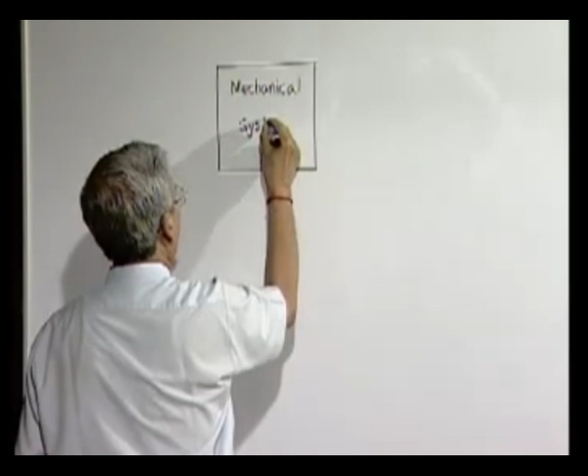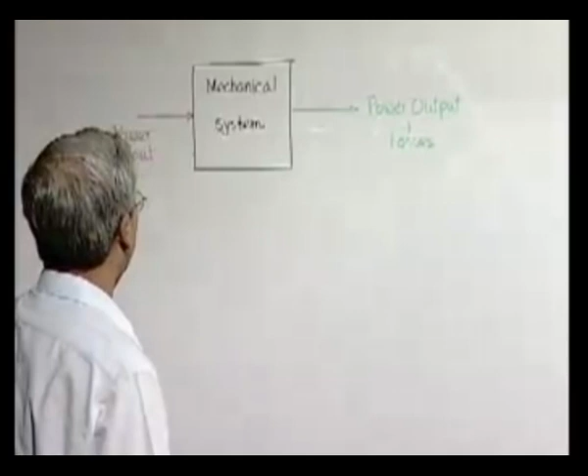If we take a mechanical system, its condition can generally be specified by two things: how much power input is there, and how much power output plus losses. So what is happening in a mechanical system, irrespective of its nature, is that there is power input from one side putting energy into the system, and the mechanical system is doing some work and spending energy, with some losses in between because of friction etc. within the system.

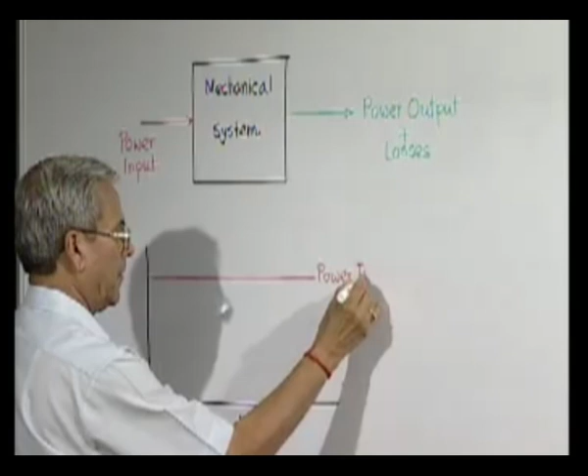Now, what are the different situations possible? If we consider that with time the power input is something like this, and the requirement of energy for doing the task plus the losses are something like this.

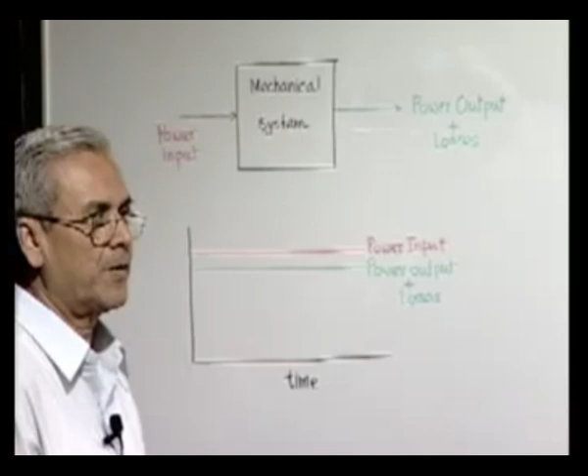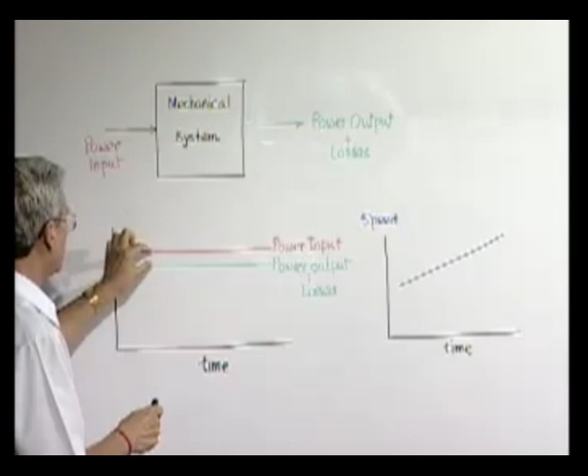Now we know that if we are putting energy at a higher rate than the rate at which energy is being consumed, what is going to happen? Energy can never be destroyed, so it remains in the system. It gets accumulated, and a mechanical system accumulates energy in the form of kinetic energy. So the speed at which this mechanical system is operating will gradually change, and we will find that with time the speed of the machine will gradually increase, because more and more energy remains in the system, resulting in a gradual increase in kinetic energy, that is the speed of the system.

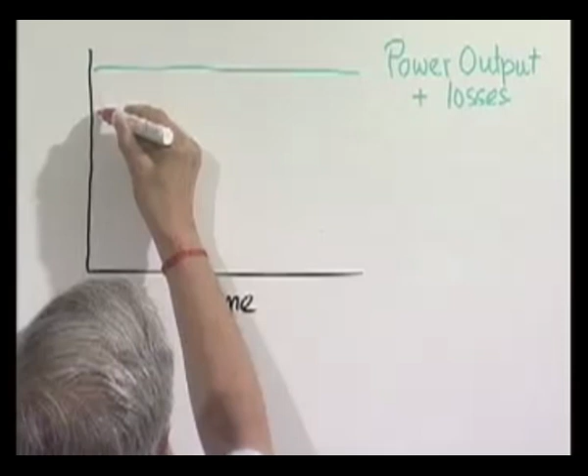The reverse situation is there where it can be less. Repeating the same diagram, only in this case now your power input is less and the power requirement or expenditure of energy is at a higher rate. So the reverse thing will happen here. Whatever energy, or the rate at which we are putting energy into the system, we are consuming energy at a higher rate, and where from that extra energy is going to come?

Obviously, whatever kinetic energy is there in the mechanical system, part of that will supply the deficiency. As a result, we can easily understand that in this case, with time, the speed of operation of the machine will slowly decrease.

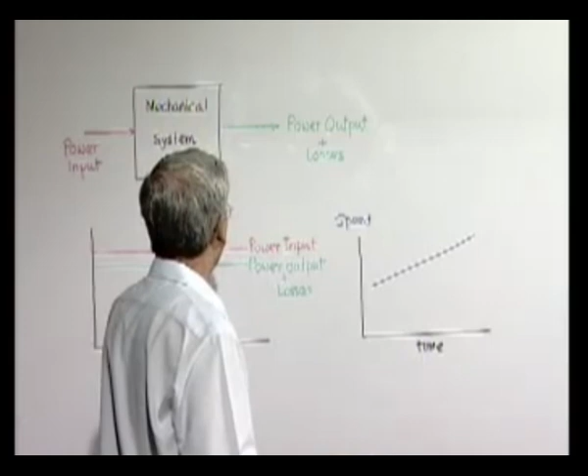Both these types of operations are called unsteady operations. You can see that when we are starting an engine, initially the speed of the engine was say zero, then gradually it increases. During that period we have to put more energy into the system to bring the operating speed to the final steady level. Similarly, when we stop some mechanical system, the power output will still be there because work is still being done, but power input has been switched off, so the speed will slowly come down. These are the transient periods at the beginning and end of operation.

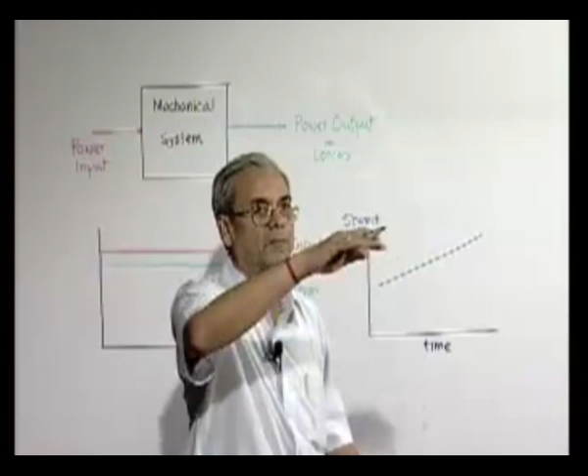But during the actual operation of a machine, what happens? We expect the operating speed of the machine to overall remain the same. So in a real situation, though we have shown diagrams like this, the speed is never that steady. There is a rising curve and a falling curve, something like this. But what we are concerned with primarily is when the speed of operation of the machine remains constant, that is, steady operation.

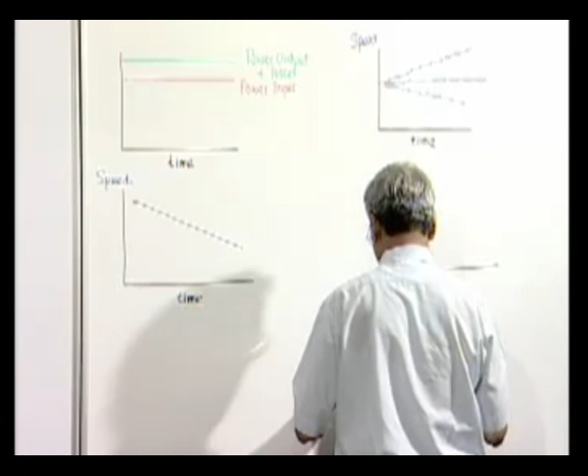The ideal steady operation will be like this: with time, the energy input is like this, and the energy output and losses are also equal. So this is the idealized situation for steady operation.

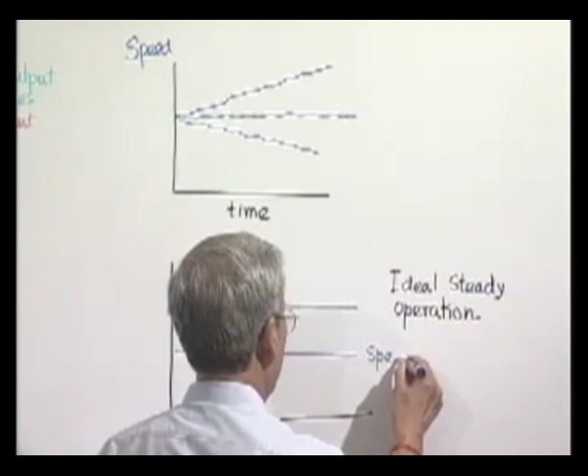And the speed in this case will be just constant again. But we all can understand that in reality such a perfect situation is never realized. What happens is the average of the power input and average of the power output plus losses will be the same, and the speed will also remain the same on average, though there will be fluctuations.

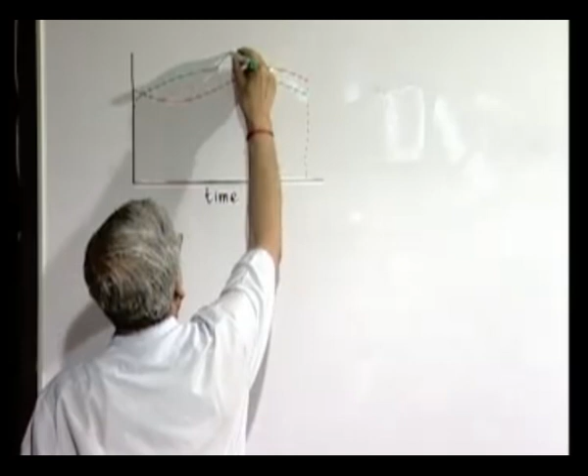What is that situation? Let us examine it in more detail. Let us take up a case where the situation is like this, with time the input and output power variations are something like this. This is one complete cycle, so this is the output power, and this is the input power.

What we can realize is that the average will be the same for both the input and output. So this is both the average of input and output power.

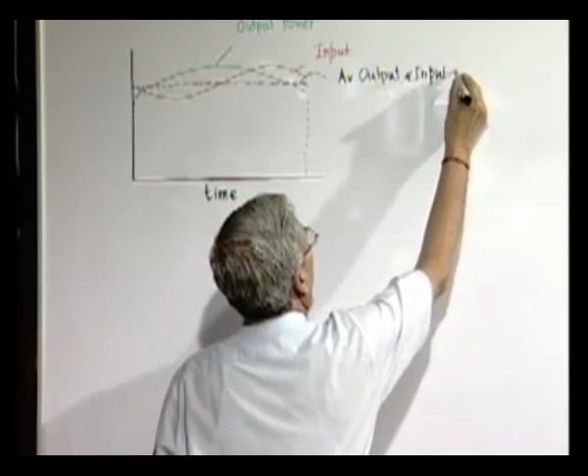Now what is going to happen to the operation of the system? That means the speed of operation. We see that though the average for both the input and output powers are the same, there are locations where, at every instant except for this instant and this instant, everywhere else the instantaneous input power and instantaneous value of the output power are different.

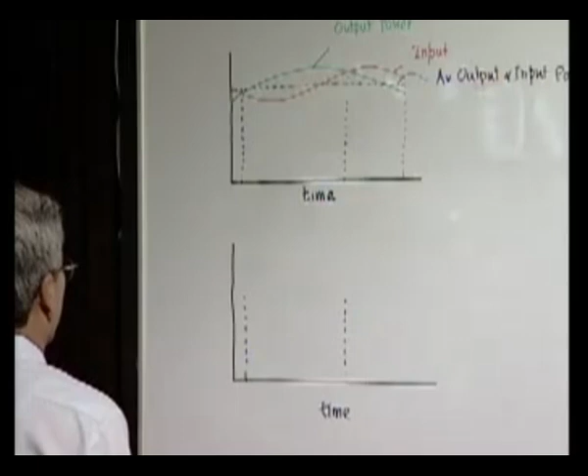So what will happen is that depending on the situation, the system will either accelerate or decelerate, except at two instants where the input and output powers are exactly the same. So what is going to happen during this period where output power is more than the input power is obvious, the engine speed will come down or slow down. Similarly, in this period, from here to here, this is one cycle.

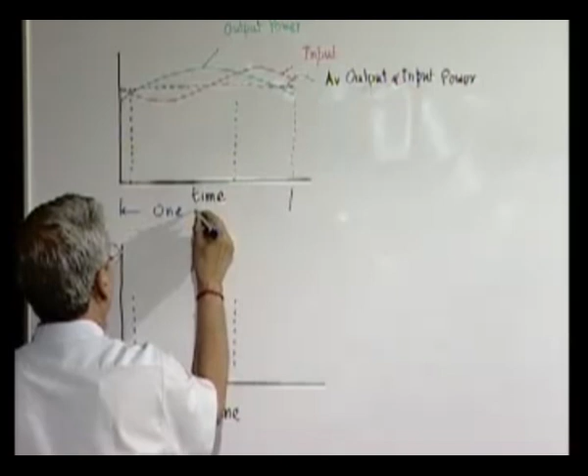Because in steady state everything will be in a cyclic pattern, this is one cycle, after which the pattern repeats. So here what will happen, input power is more, so obviously the speed will increase or the system will accelerate. So therefore, the situation will happen like this.

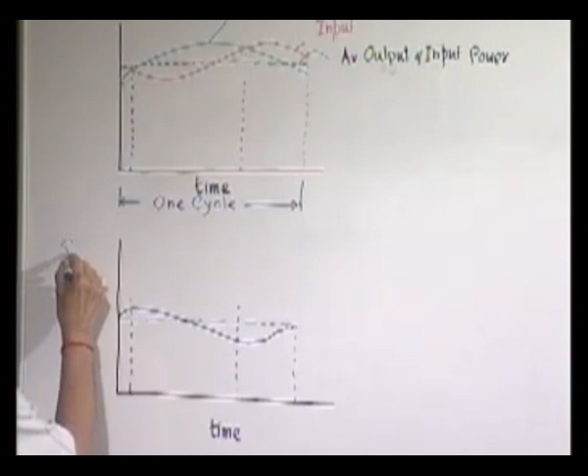So speed is constantly decreasing from here to here because output is more, and speed is increasing here because input is more. Therefore, you can see that in general, where the output power and input power instantaneous values do not match at every instant, but the averages are the same, though the average speed will remain constant, the instantaneous value of the running speed of the system will change or fluctuate, and there is a cycle after which the whole thing will repeat.

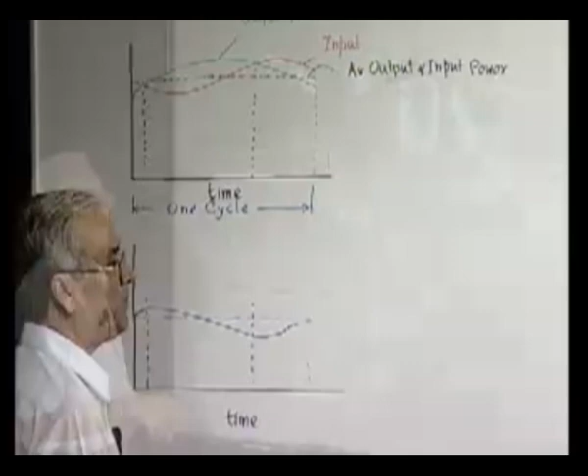This is in general the situation with all cases. So therefore, we find that we now have a non-steady or rather non-smooth operation. The operating speed of the system is fluctuating. In the previous case where we discussed the balancing of unbalanced masses, the nature of non-smoothness was due to the shaking forces produced by the unbalance. But here the non-smoothness of the operation is because the operational speed is fluctuating, and this is the reason for that. So now let us consider the cases which we will generally encounter.

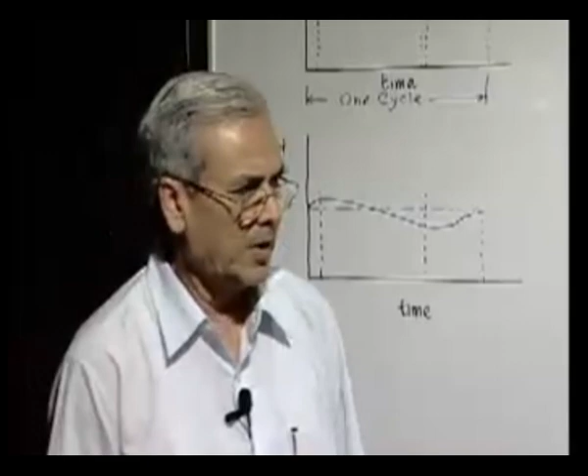In general, we will find two types of cases. Of course, this is the most general situation where both the output power and input power are both varying like this. But in general, we will take up the cases often encountered. There are two situations.

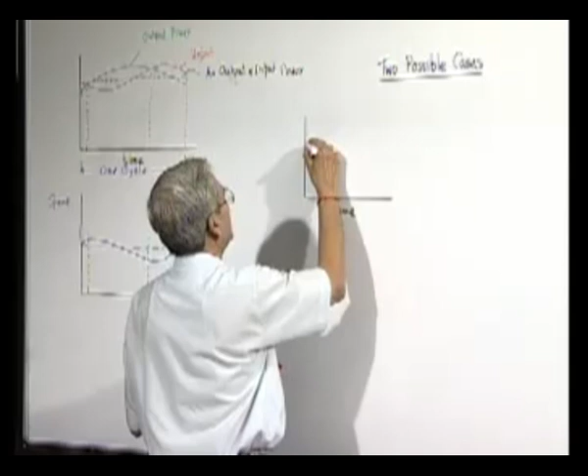One in which the input is fluctuating and output power is uniform, over one cycle. And the other situation, idealistic situation of general nature, is where the input is constant and output is fluctuating.

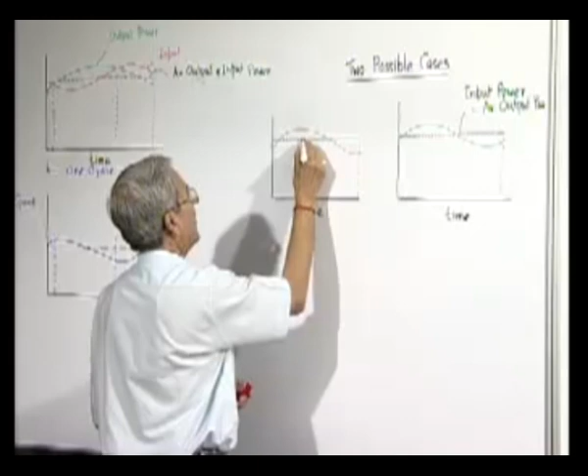In both cases, we have to keep in mind, because it is a steady operation, this is not only the input power, but it is also equal to the average output. Similarly here, this is not only the output power, but it is also equal to the average of input power.

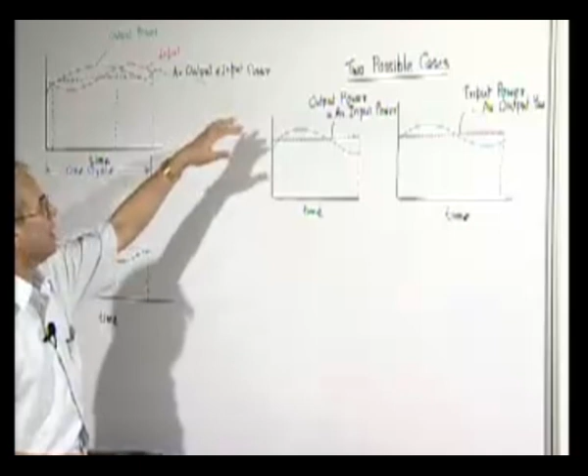So these are the two generally encountered situations in mechanical dynamics or machine dynamics, where in one case the input power is fluctuating, output power or the load is constant, whose average value happens to be equal to the average of the input power, because otherwise the situation will not be steady. The speed will slowly change, not just fluctuate. And the other possibility is that where the input power is more or less constant, but the output power or the requirement, the load, is fluctuating, and again the same condition for steady operation applies, that the averages of both are the same. Now for these two possible cases we can think of examples.

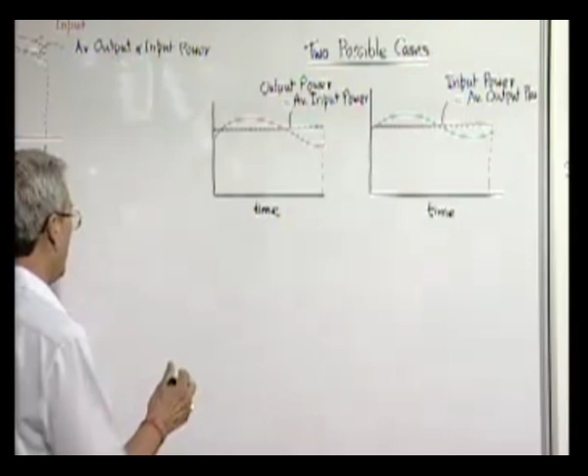Now we can get very common examples in this case, say where the input power is fluctuating, the output power is uniform or steady. A very common example of that will be an engine, an IC engine driving a generator set.

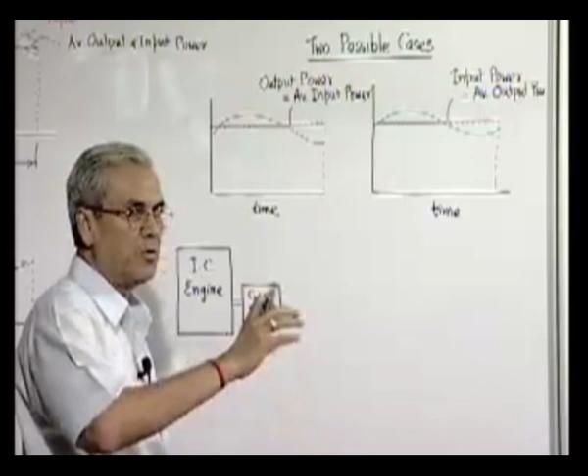Producing electric current, and the load is constant, this is the IC engine, say diesel engine. Here you will find the mechanical torque produced on the crankshaft is fluctuating, that is input power is fluctuating, but the load or the resisting load produced by the generator is constant, as our electric load is constant. So this will represent a situation like this.

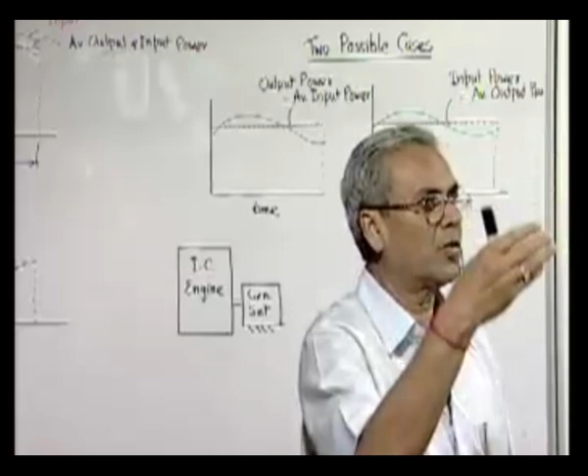On the other hand, if you take up a case where a motor is driving a punching machine, for example, a die punch machine. So here what happens, motor is producing a constant voltage and constant torque, so input is constant, but the load requirement is fluctuating. Most of the time there is no load except friction, then once the punch comes in contact with the plate or the sheet metal, immediately the load starts increasing.

So here you will find that the situation is something like this. In both the situations the speed will fluctuate. Our objective of this discussion is to find out the ways and means to estimate the speed fluctuation and how we can keep it within tolerable limit.

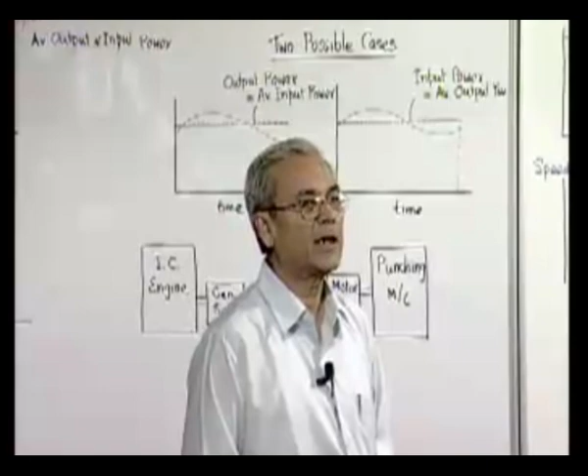The point we have to keep in mind is this, that though the average speed remains constant, the instantaneous speed varies and it fluctuates. Now, depending on the operation, there are permissible limits to which we can allow this operating speed to fluctuate. If the operating speed fluctuates too much, then the functioning or the performance may not be acceptable. And therefore, we will see what can be done to keep that fluctuation of speed within the permissible limit.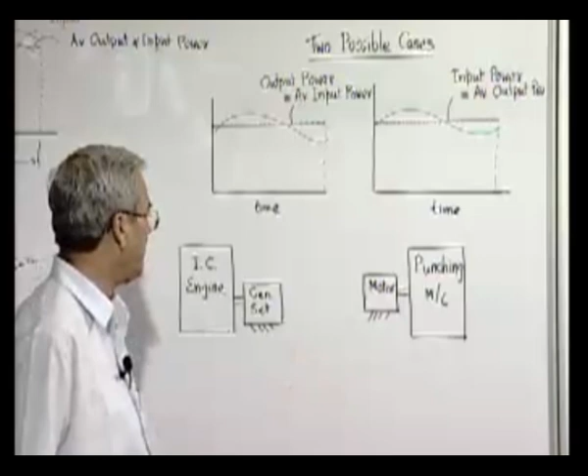So, we will first take up the most commonly encountered situation, that is an engine driving a mechanical system, either a pump or a generator set or a machine or something.

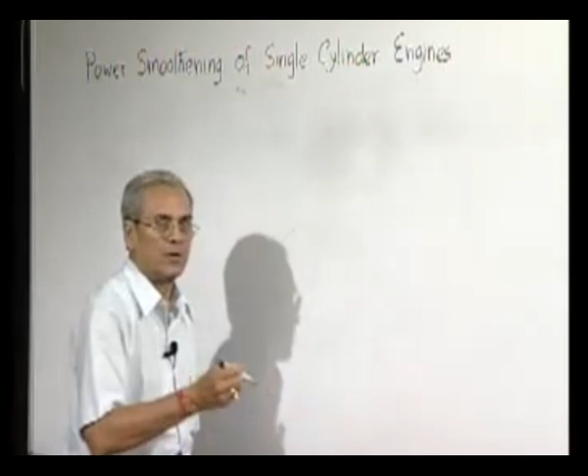So, we will take up the very commonly encountered problem of the nature we are discussing, is the power smoothening of single cylinder engines. So, what we will do first is to find out the fluctuation of input power in case of such a situation. So, we will again come back to our model of...

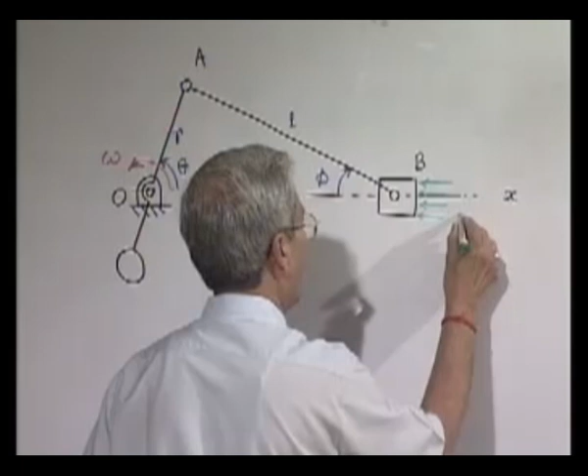So, this represents a single cylinder engine. Now, what we have done, if you remember our previous lecture while discussing the unbalance of a single cylinder mechanical slider crank mechanism, we saw that it is possible to replace the mass of the connecting rod AB into two parts, one at the crank pin here, other at the reciprocating mass here.

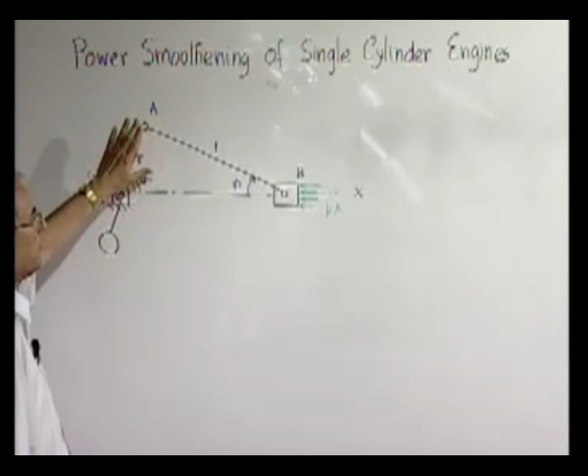And we have seen that this mass, the crank's original mass, all these are actually purely rotating objects, and therefore, to balance that we always generally put a balancing mass, but really it does not play any role in this analysis which we will be doing. On the other hand, the other apportioned mass which goes here, that along with the mass of the piston etc., in total becomes reciprocating mass, that we have seen.

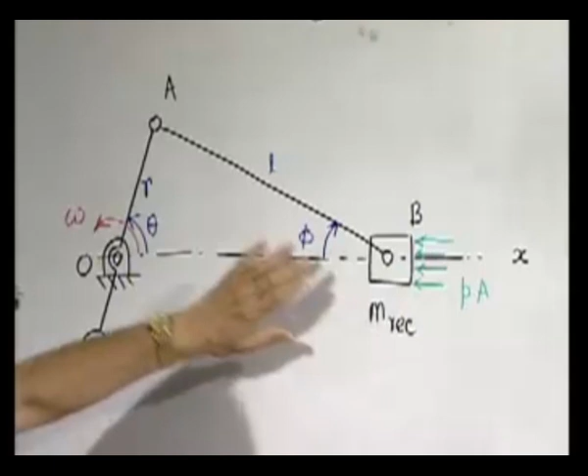Now, what we will do here is to find out that if a gas force, which is the pressure at the instant of the gas within the cylinder, multiplied by the piston area A, this total gas force produces how much turning moment on this. The reason is this, that turning moment M, that multiplied by the speed gives the power input.

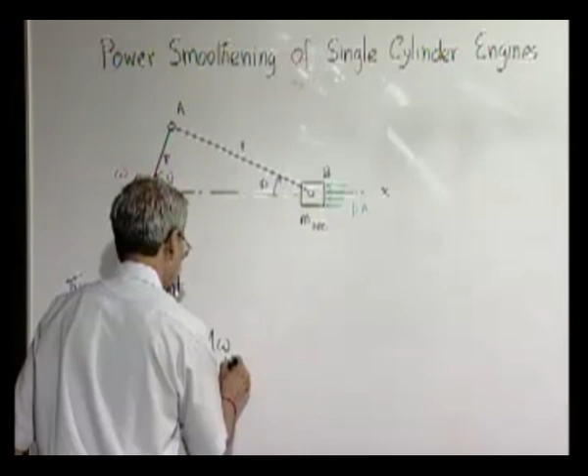Now, if we are considering a case where we consider the input speed or the running speed omega to be constant, approximately constant, then what really tells about the fluctuation of input power is also the fluctuation of turning moment, which is that because input power is nothing but M into omega. So, when we take this as constant, then fluctuation of M or turning moment is the critical thing, and that is what we have to find out.

So, to do that, we again take care of certain points like lambda is r by L, which is much smaller than 1, and omega is constant approximately. It cannot be exactly constant, approximately constant. Now, let us draw the free body diagram of the various bodies. This is the piston, this is the connecting rod, this is the crank.

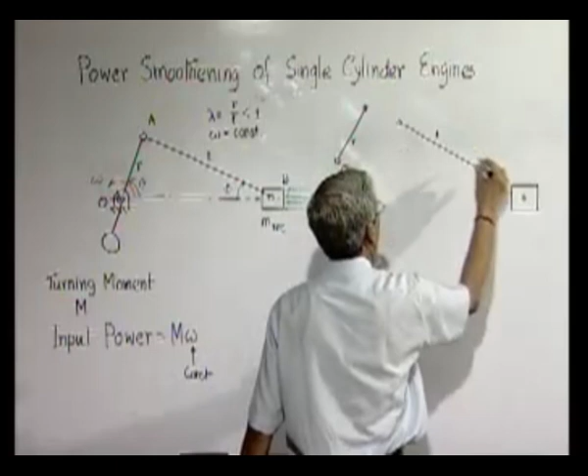Now, what forces are acting here? Since we have replaced the connecting rod by a massless rigid rod, with the mass of the connecting rod or coupler AB placed here and here, this is effectively a massless rigid connecting rod. Therefore, any force on this has to be along this line. If we call this force Q, then equal and opposite forces will act at B.

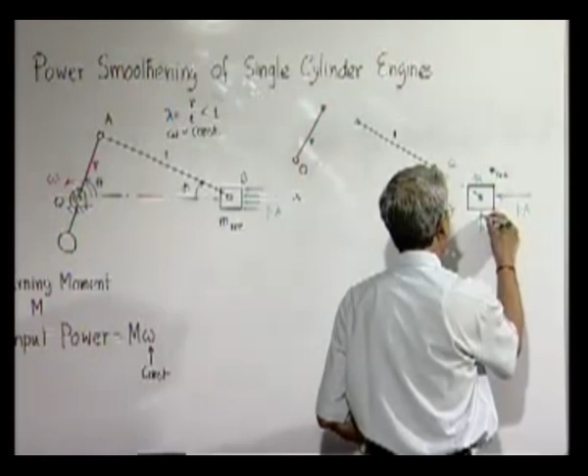The force on the piston and the reciprocating mass will be in this direction, and the normal reaction from the cylinder wall - these three forces will produce a resultant force in this direction, because it can accelerate only along this direction, which is x. Therefore, the total force along the y direction has to be 0 according to Newton's law.

Now, the force Q, which is aligned along the connecting rod, has to be balanced by an equal and opposite force at the other end, because this body being massless, it cannot accept any resultant force acting on it. According to Newton's third law, the force at point A will act, which is again equal and opposite to this.

Considering this, the turning moment is going to be this force Q into the perpendicular distance of the line of action of this force from the hinge crank point - that is the turning moment. So, as our objective is to find the turning moment M acting on the crank pin, let us first find Q.

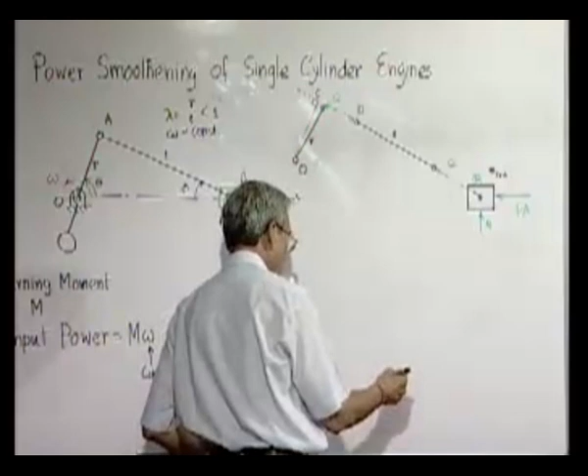So, Q cosine phi minus PA must be equal to the reciprocating mass into the acceleration in that direction, x2 double dot.

In our previous module, we had a detailed discussion on the acceleration of this sliding body x2 double dot, and we found that x2 double dot will be given by a certain expression - this result I am not going to discuss again because we have already derived it in the previous module.

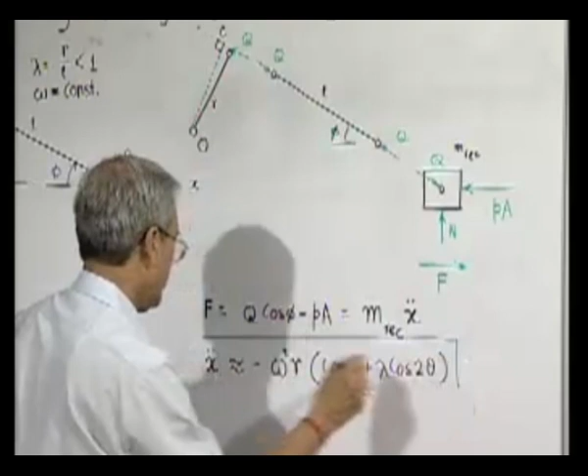Using this, we can write that Q will be approximately equal to PA minus M reciprocating... So, we have found the force Q.

Now, what will be the moment produced by this force? What is this moment produced? That will be Q into this distance.

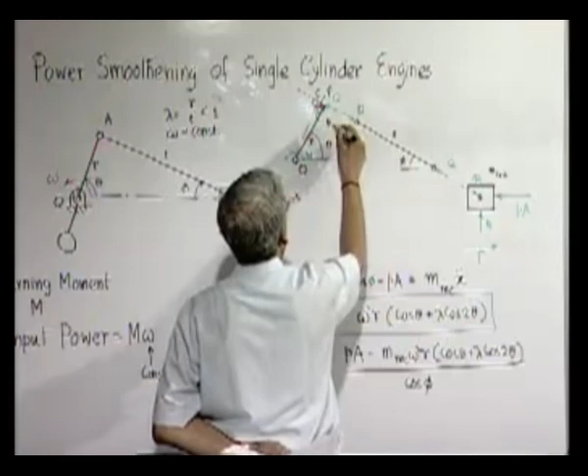If you take this right angle triangle, this angle is theta. How much is this angle? Phi. So this total angle, and this angle is theta. So this perpendicular distance OC is nothing but R sine of theta plus phi, from trigonometry. This angle is theta plus phi, so it is R sine theta plus phi.

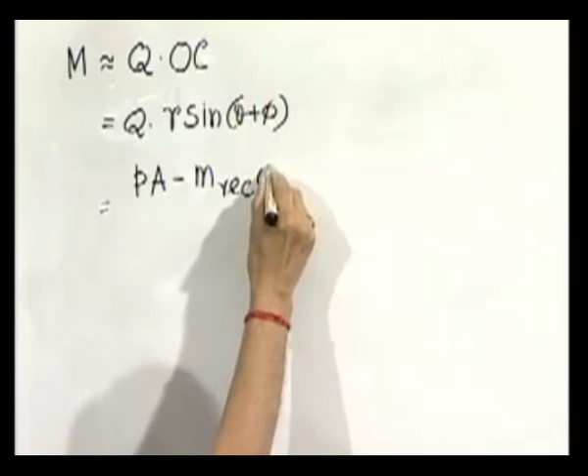And we can write this is equal to, therefore - this is the expression for the turning moment, which you can see is actually a function of theta. That means it varies with theta.

But here we have another quantity which also varies with time, and that is phi. So let us try to see if it is possible to express turning moment purely in terms of theta. The turning moment expression we have is a function of theta and phi, because this gas pressure acting on the cylinder is also a function of theta, as you will see.

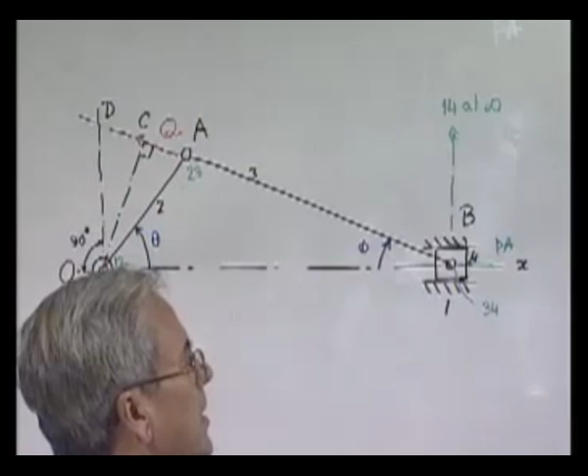However, it may be desirable to express the turning moment completely in terms of one variable only, theta, because theta and phi are dependent. We can do it in this particular way. Say...

The moment of this force Q about this point O is obviously the magnitude of Q into the perpendicular distance from this point, this crank pin, which is OC.

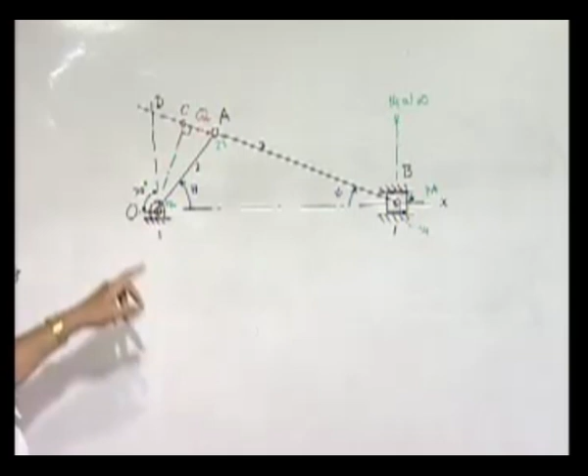Then you will see that we can find this point D, which is the intersection of the extension of line BA with the perpendicular drawn on the line of stroke, that is the x-axis. This is point D. We can easily show that this point D is nothing but the instantaneous center, or relative instantaneous center, between link 2 and link 4, that is the slider or the piston.

Here we know that the turning moment is approximately the force Q, which is PA minus M reciprocating omega square R cosine theta plus lambda cosine 2 theta, divided by cosine phi - this is the force Q, into the perpendicular distance OC. Actually, R sine theta plus phi is nothing but OC.

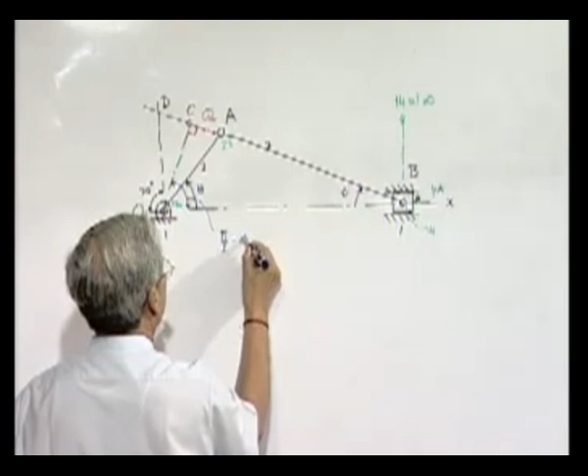Now, from this right angle triangle, we find that this angle - this is right angle triangle OCD. This is the right angle, this is angle phi. So this angle will have to be 90 degrees minus phi. And since this is 90 degrees, this angle is nothing but...

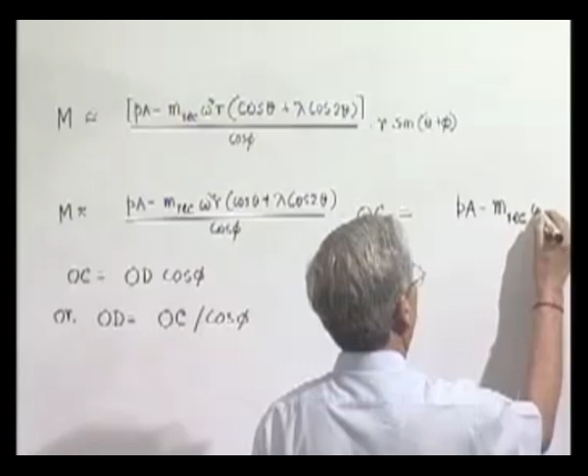So we can write that OC is OD cosine phi, or OD is equal to OC by cosine phi. So, therefore, using this, we can now write this is equal to OC by cosine phi, which is nothing but...

So, we have to now find out OD as a function of theta, then our objective will be fulfilled. Now, you are familiar with the technique of using Aronhold-Kennedy's instantaneous center theorem for finding out those relative instantaneous centers which are not known.

Now, in this slider crank mechanism, this is the fixed link 1, this crank is link 2, connecting rod or coupler is link 3, and the piston or slider is link 4. So directly we get the relative instantaneous center between link 1, the frame, and link 2 as this hinge. Between 2 and 3 is this hinge, between 3 and 4 this hinge, and the relative instantaneous center between the fixed frame 1 and 4 will be at infinity in a direction perpendicular to the axis x as indicated here.

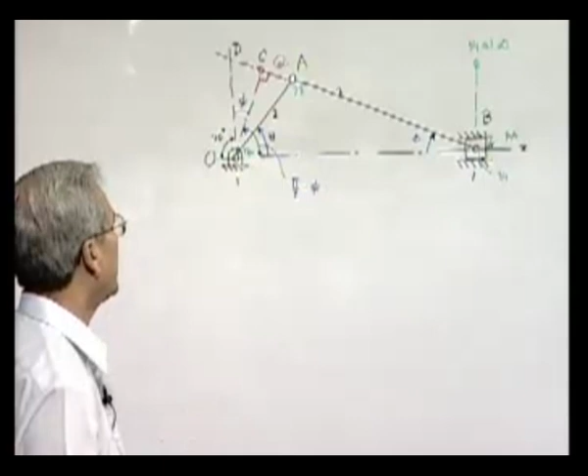Now we know from Kennedy's theorem that to find an instantaneous center between two objects, the three relative instantaneous centers between three bodies must lie in one straight line. So if we want to find the relative instantaneous center between link 2 and link 4, that means 2,4, how can we find it? Considering links 2, 3 and 4, we know that 2,3, 3,4 and 2,4 must lie on the line joining 2,3 and 3,4. So this is the line 2,4 on this.

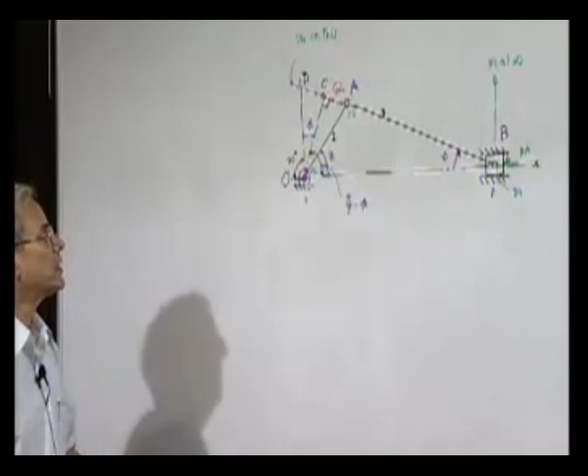Again, if we consider links 1, 2 and 4, then the instantaneous centers 1,2 and 1,4, along with the other relative instantaneous center 2,4, must lie on this particular line. Now if we join 1,2 with 1,4, which is at infinity in this direction, we get nothing but this line. So 2,4 lies on this.

And therefore, the solution is this. Now what does it mean? It means that a point attached to link 2 but located here has the same velocity as a point attached to link 4 located here. That means, what is the velocity of a point on link 2? Now, link 2 is having an angular velocity omega.

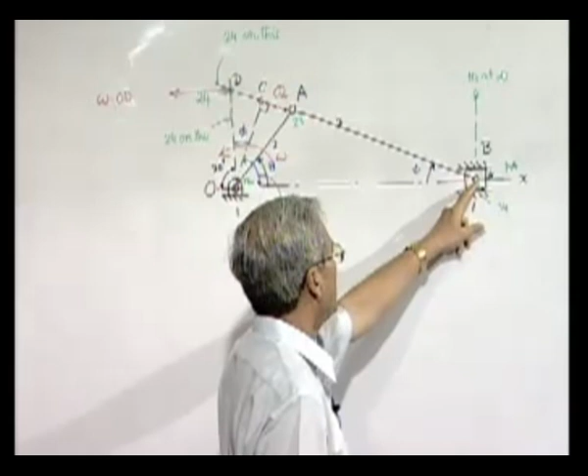So the velocity of this point will be omega into OD, and the velocity of this slider, because it is a translating body, is also the same as this, and we know that this is nothing but x dot. So the velocity of this point has to equal the velocity of this slider, because it is a translating body, and velocity of all points of this translating body 4 is x dot.

So we find, but unfortunately we have taken x in this direction, so positive x dot will be in this direction, whereas with the given omega, the value of omega into OD is in this direction. So we can write that omega into OD equals minus x dot, or OD is nothing but minus x dot by omega.

Using this here again, we can write this is equal to PA minus m reciprocating omega square r, cosine theta plus lambda cosine 2 theta, and OD will be equal to minus x dot by omega.

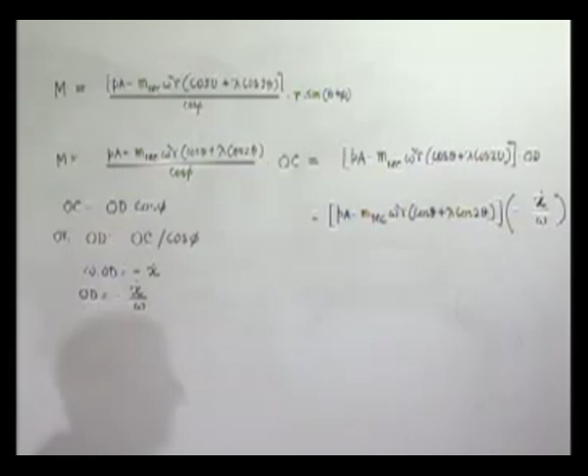Now let us recall our memory from previous modules, where we derived the expression for x dot in terms of theta, omega and r, and we know that x dot was minus omega r sine theta plus lambda by 2 sine 2 theta. So finally we get...

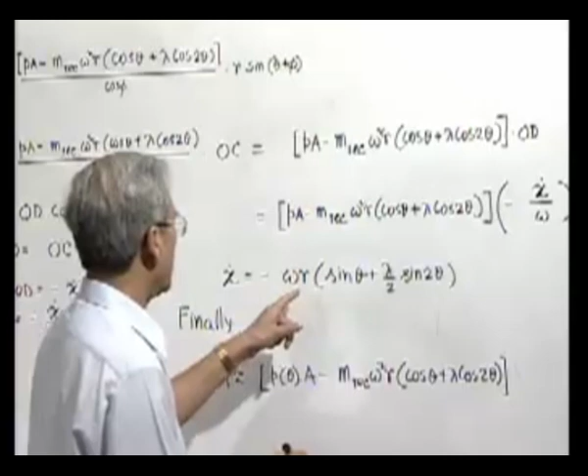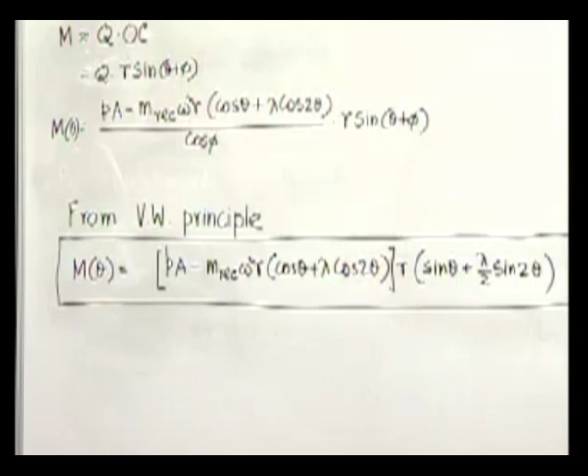To do that, first we will consider the most commonly used engine, that is a single cylinder 4-stroke cycle engine, which is operating on the Otto cycle, that is a petrol engine. Let us see, and as mentioned, let us take up the case for a 4-stroke cycle petrol engine.

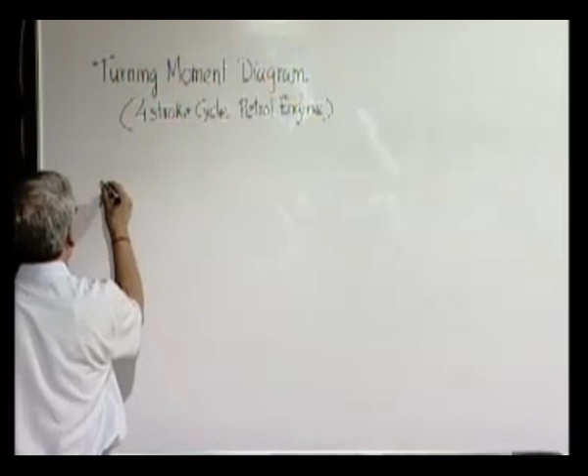Here most of the things are of purely geometric nature, except the gas pressure. This is the gauge pressure, the pressure above atmospheric in the cylinder, which is actually a fluctuating thing that changes with theta. How it changes, we can see if we look into the Otto cycle.

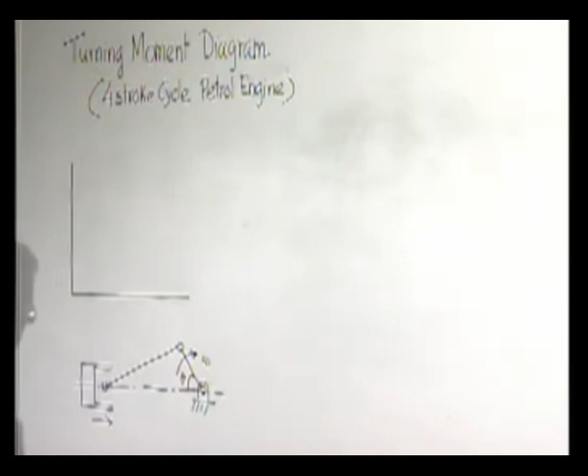Now suppose we know that the piston displacement is in this direction, and since the cross-sectional area of the cylinder is constant, this in a way also represents the volume of the gas inside. So the pressure and volume, the PV diagram of a petrol cycle or Otto cycle, look like this. Only thing here, on this side will give piston displacement.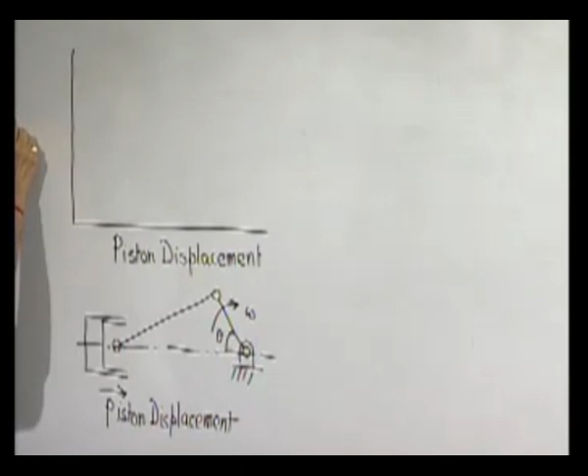On this side we will have P plus, if this is the atmospheric pressure, then the first stroke is a suction stroke, where the pressure inside will be slightly lower than the atmospheric pressure, and a partial vacuum is created.

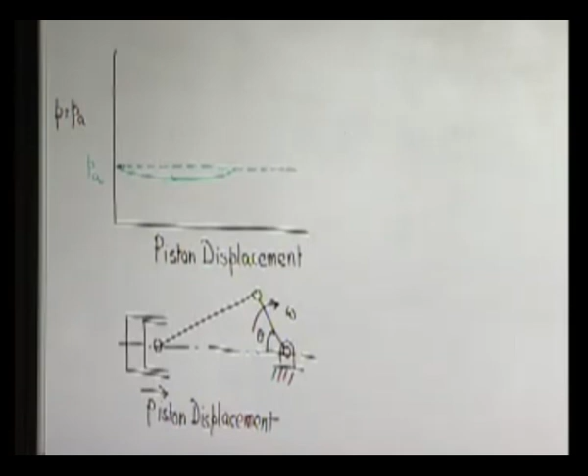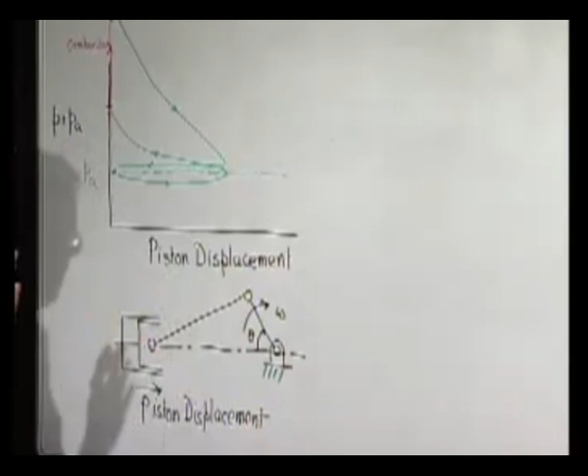Then there is the compression stroke. Pressure increases because the valves have been closed. Then there is firing, and this is the combustion stroke. This is the firing. Next is the expansion, where pressure comes down, and the last stroke is exhaust, where again the piston pushes out the burnt gas, and to push it into the atmosphere the pressure has to be slightly above atmospheric.

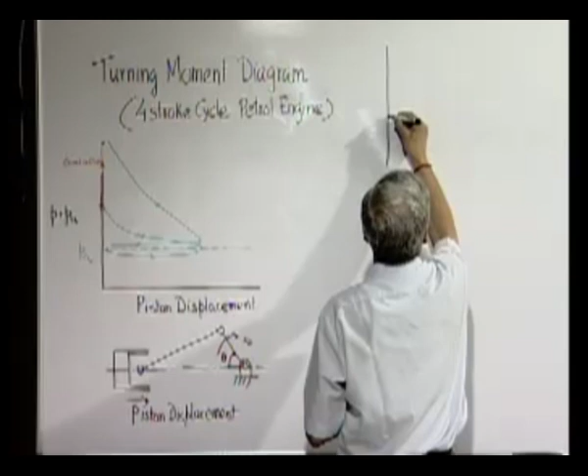So if this is the typical Otto cycle on which the petrol engine runs, what will be the nature of the turning moment? Since it is a 4-stroke cycle, the total range of theta for a complete cycle will be 4 pi.

So P or PA, whatever it may be, let us plot PA. We can see it will be nothing but this multiplied by the area. So the nature will be more or less the same.

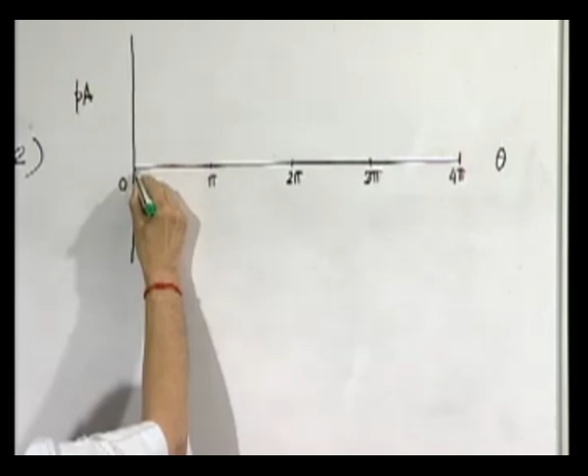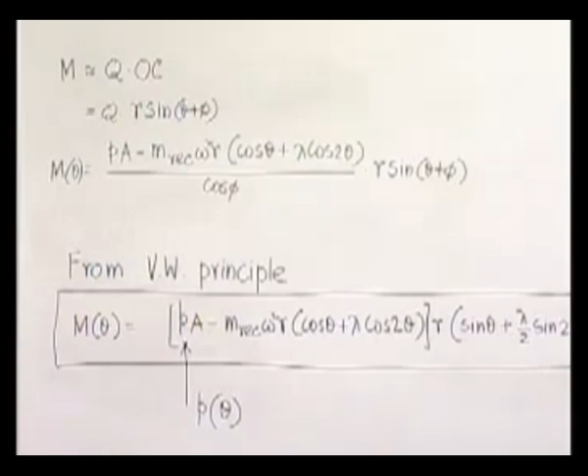If we spread it out, it will look something like that, P into A. Now we have to subtract this, that is the inertia force. This is nothing but the inertia force, and that is going to be something like, depending on the speed.

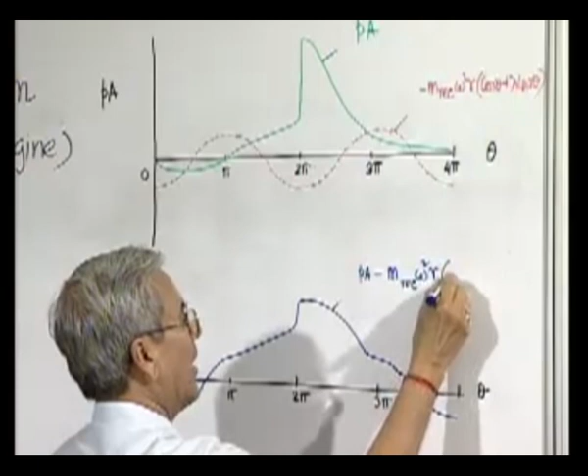Now when you add these two, it should take a shape like this. This will be PA minus m reciprocating omega square r, just the summation of the two others.

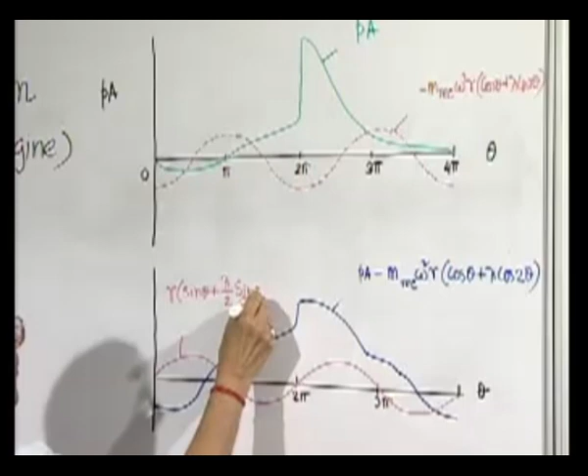Now we have to multiply this by r into this quantity. How does this quantity change? That quantity changes in this form. So finally the turning moment will be nothing but the product of this and this value. Thus we can draw the final turning moment diagram.

Now we can see this is 0, so obviously this is a point which we will have. Then again this is 0, obviously it has to pass from this, and this is negative, this is positive. So it will be something like this. Then this is again 0, so it has to pass through this, and here this is negative, this is positive.

So the whole thing up to this will be negative. Now both are positive, so it will be positive, but it will again become 0. It will be something like this. And here again one is negative, one is positive up to this point. So it will be 0, and here both are negative. So therefore, the product gives us this final turning moment diagram.

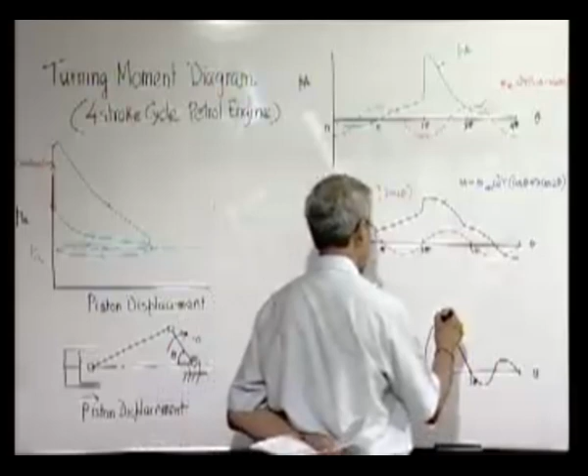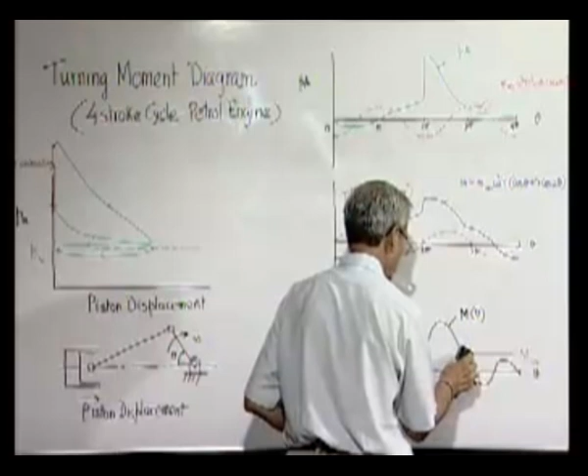Thus we can see that the turning moment fluctuates, and the average value of the turning moment will be something like this. Or if you think it's slightly on the higher side, perhaps it will be somewhere here. That means the total area bounded by the black curve and the red line, above and below, will be the same.

Now it is quite clear that in such a situation there is substantial fluctuation of energy. Here the load is more than the input up to this point, then the input is slightly more up to this, then again load is more than the input, then here input is more than the load, and so on. Therefore, there will be substantial fluctuation of speed with such a situation.

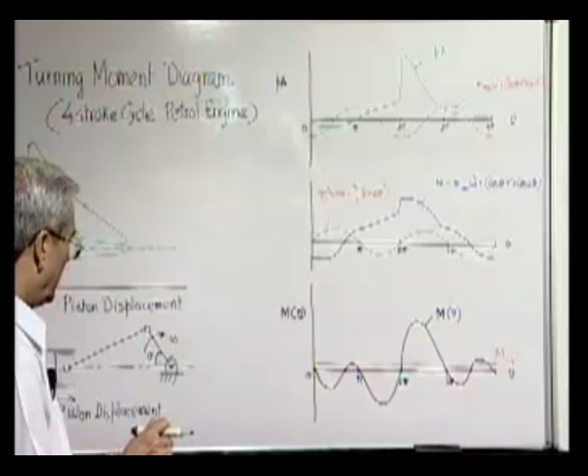Now, in the next lecture, we will see how we can find out the resulting fluctuation in the speed of operation of the engine, and also we should be able to find out what is to be done to keep the speed fluctuation resulting from such a situation within the permissible limit.